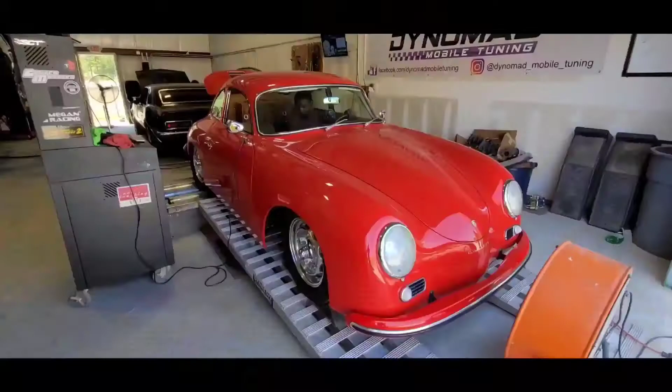Will it Dyno? KLX110, 2005, bone stock. Will it Dyno? What will it Dyno? That's what we're going to find out today in this episode of Will It Dyno.

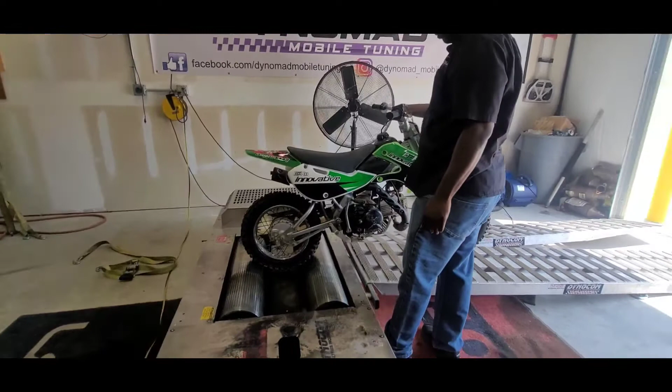What do you think it's gonna make? 15, 10, maybe? I have no idea what it should make. We're sure enough gonna find out though.

Looking good. You gotta strap it down when it's a beast. Safety first, baby. I think it needs a rear shock. Yeah, I think it needs an upgraded spring. We're a little too heavy for this little thing.

Let's get our dyno software up and running. We use a Dynocom DC5000 using Quantum. We're gonna start a new session for this bad boy. We're gonna set up a new run. Gotta turn the dyno on. Dyno always forgets it.

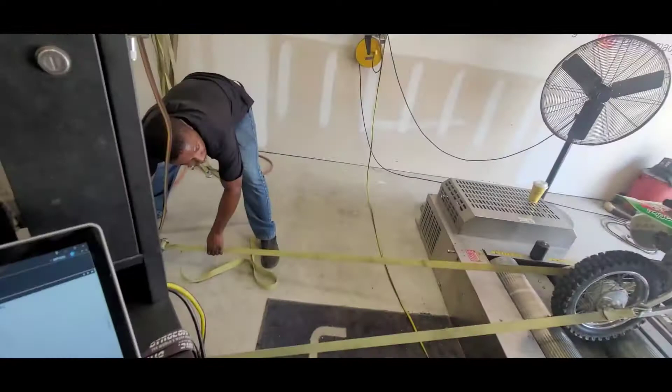I'm gonna move that top strap, that other strap, so that it's not close to the chain. It ain't gonna hit now when you let off. Good idea. We're gonna do a gear roll on, and no load, because the rollers are enough of a load, to be honest.

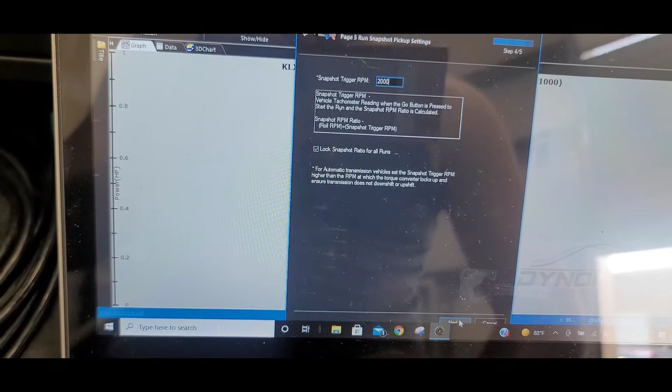Let's see, I'm gonna do snapshot. We don't know what the 1-to-1 ratio is, we're just gonna use third. We're gonna just take a wild guess at 2,000 RPMs to snap it. We really have no idea, so the power to RPM is not going to be accurate, but it will give us an actual horsepower reading. So that is good. So we're about to see what it'll do.

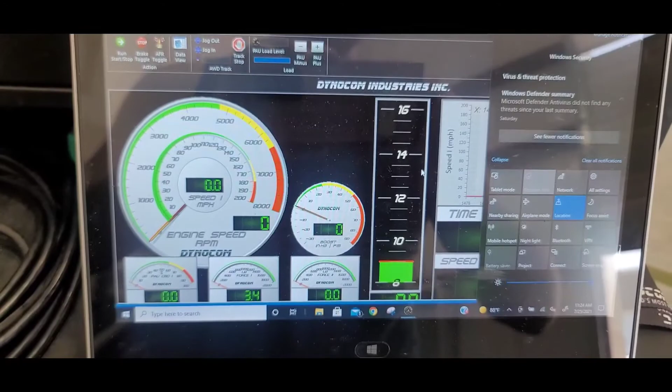So let's see, the best way to run this, you don't take this thing out, we go all the way around. Cool, it's ready. Yeah.

Fire up first shot, feet on the rollers. This is our first motorcycle. Yep. This shock. This is gonna be tricky. Alright, I just gotta make sure my feet don't hit the rollers and suck my body up into it. Easier said than done.

Alright, what sounds about like 2,000 RPM? That sounds about right, that's it. Is that right there?

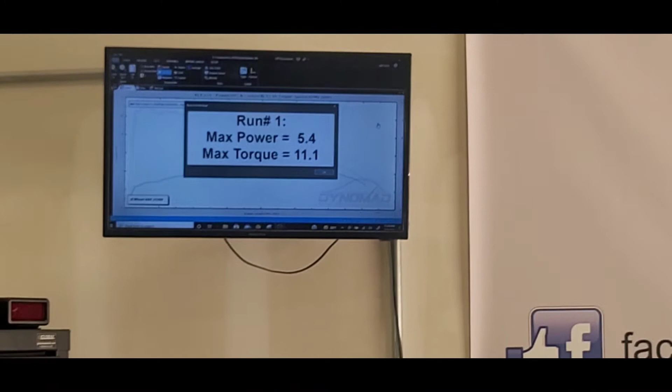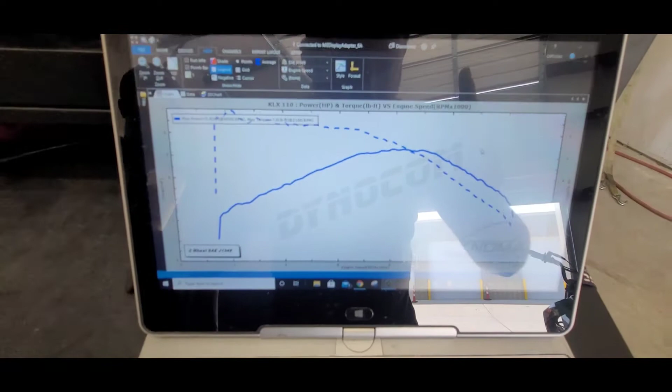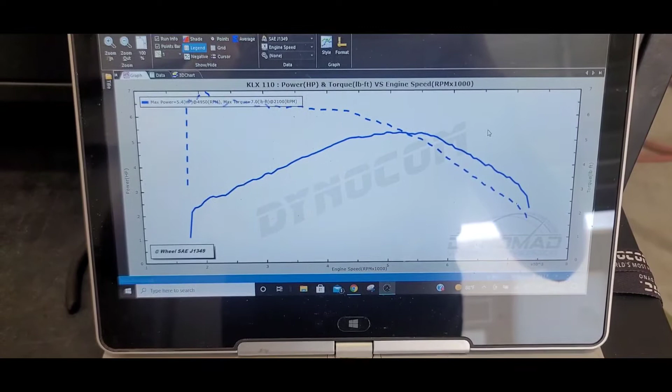All right, so what did the little KLX110 make? Well, whenever the RPM was correct, it made 5.4 wheel horsepower and 7 foot-pounds of torque. From the factory, they're rated at 6 to 7 horsepower at the flywheel and about 7 or so foot-pounds of torque. So 5 horsepower out of a KLX 110. Maybe we do some modifications to it in the future to see what kind of power we can gain out of it.

We'll see. So anyways, will it dyno? Yes, it will. Is it accurate? Yes, it was. Will we get more results later on? Absolutely. Stay tuned. Found a few things wrong.

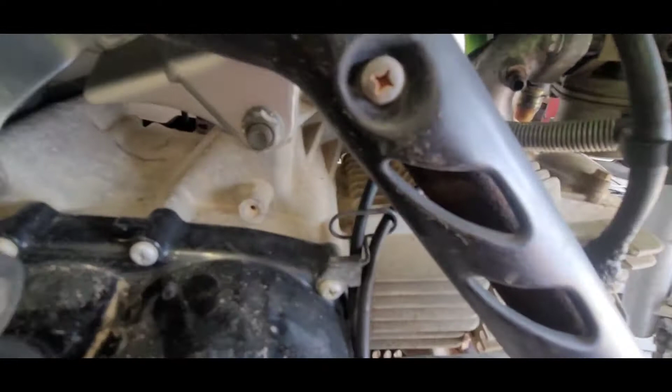Whatever this little, we know nothing about dirt bikes. Oh shit. Oh no. Oh no. Don't fall. Don't fall. Don't fall. You can, come on. Oh God. Oh no. You can do it.

Okay, yeah, so whatever that hole is on the, I guess that would be the intake manifold going to the head, there was like a little cap on it. I'm pretty sure that's a big vacuum leak. So it just dynoed at 5 horsepower with a big vacuum leak. We're gonna fix that. Maybe we'll do it again and see what it does.

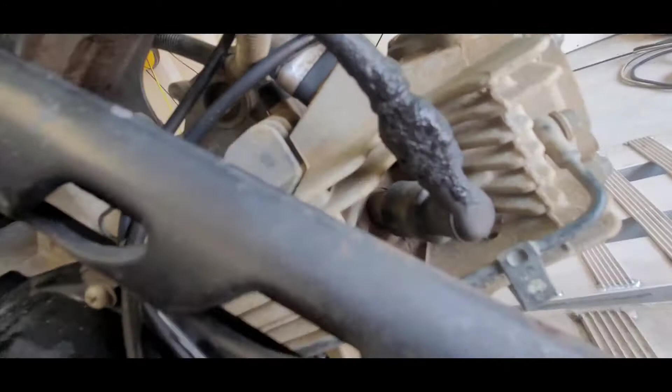I don't know, I'm sure this thing has all kinds of weird quirks. I mean, look at this spark plug wire, that can't be good. Picked it up yesterday, no idea the condition. So we'll fix that and see what it does.

All right, got that little leak fixed. Good old cap and a zip tie.

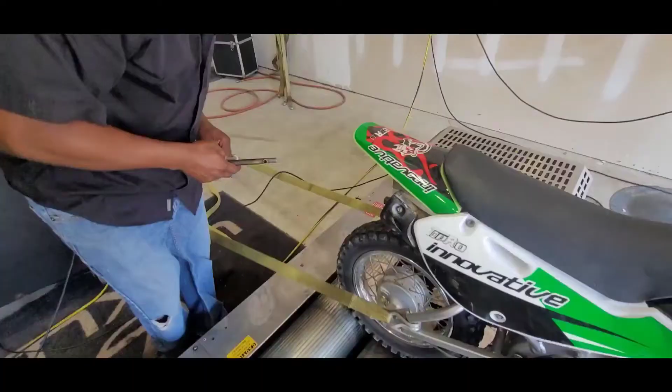Well, there's only one good way to find out if something is running right. Not zip ties, but...

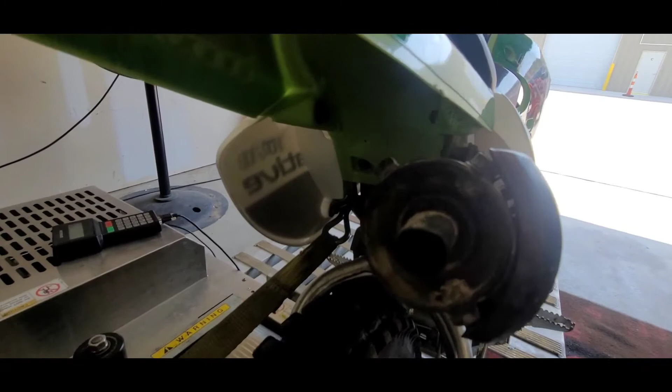AFR gauge. We want to know what the air to fuel ratio is coming out of this thing. So we're gonna put something right there in that little tailpipe, and it's gonna tell us if it's running lean or rich, and we can jet it accordingly. Maybe it's perfect, who knows?

I'd be expecting this thing maybe, I don't know, what do you think it should run, in the 13s? 12, I mean. Hey, which one of these is good? Probably not the one that's hanging on the wall. No, both of them are hanging on the wall. Well, let's find out, we're gonna make this work.

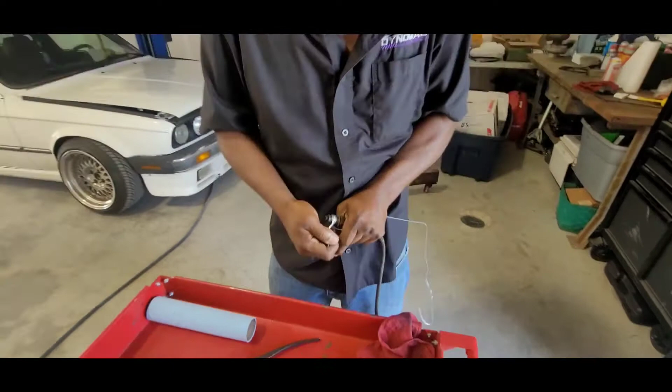Whatever we gotta do to get it in there, secure. Oh, I see, okay. You just... okay, see, this is why I can't be giving away all my damn tricks. Well, maybe I'll edit it out, maybe I won't.

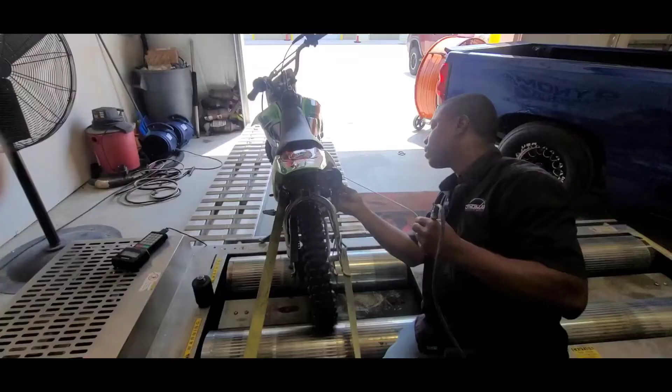The sniffer wouldn't go up in there? It'll block the hole. Oh yeah, well probably not the best solution. So this will be completely inaccurate, but it will tell us something. So we'll see how it goes.

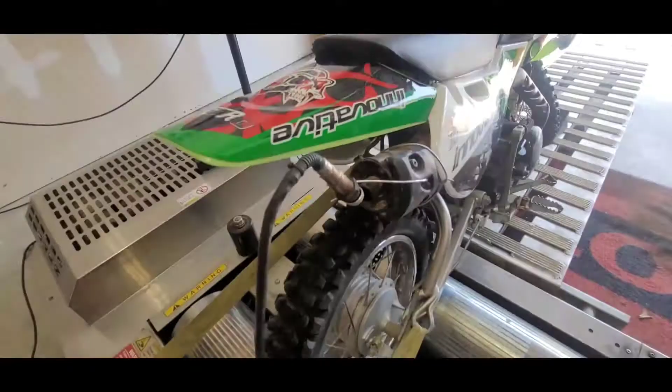The man is a genius. I mean, it'll give us something. That's the angle of the dangle that you need and everything. It is in free air, so it ain't gonna be that accurate, but it'll be interesting to see the result.

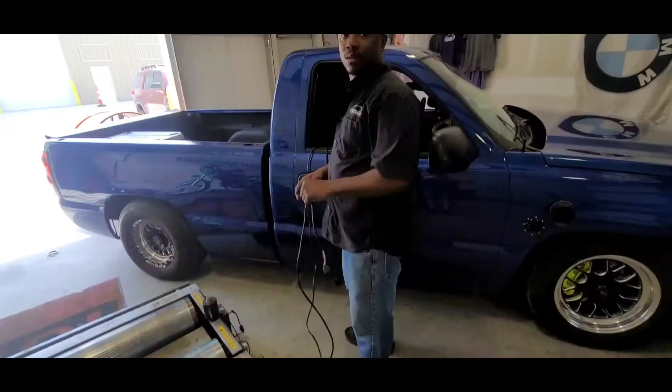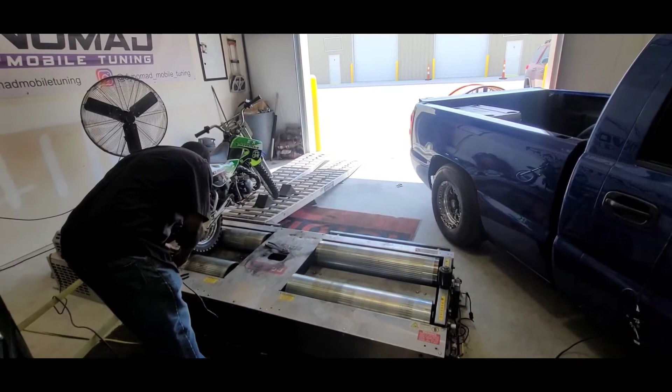One thing we didn't consider was the power output for the wideband, so we're just gonna borrow power from power. I'm gonna borrow some power from Zach's little Silverado here.

Probably one of the prettiest trucks I've ever had come in through the shop. What is that? What do you even do with that? What's that for? Why would you do that on a street truck? Jesus Christ, this guy's crazy.

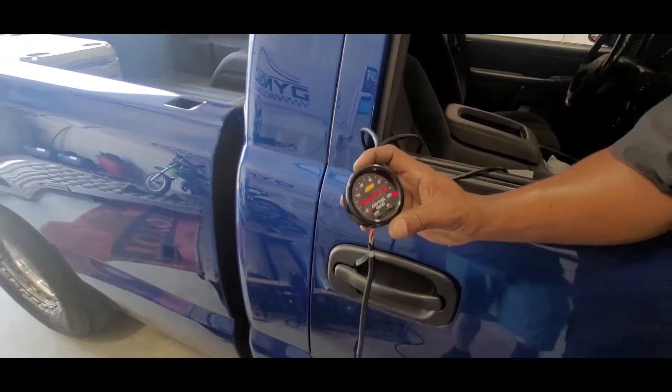Well, that's gonna work just fine. Connector out of the way, and it's reading off the charts as it should. We're gonna find out what it reads. Nope, nothing now, but when you get on it, oh yeah. What's it reading? 13, gets down in the 13s. About what I expect.

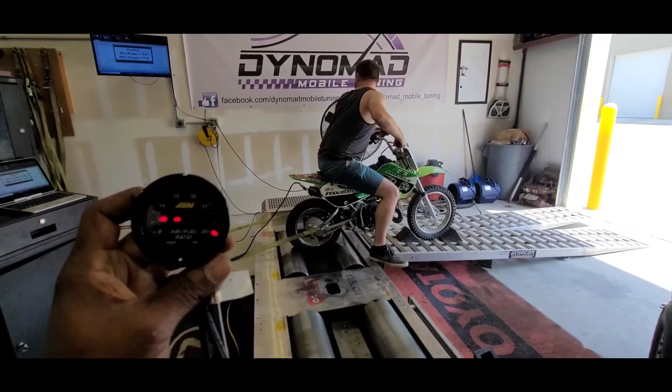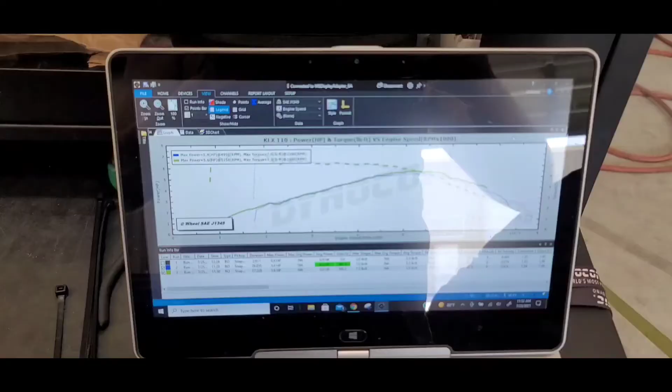Well, picked up a little power, probably from nothing, honestly. It probably means absolutely nothing, but you know, it did pick up a little power.

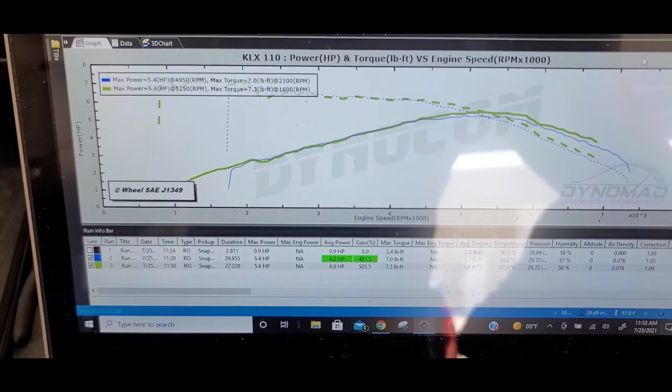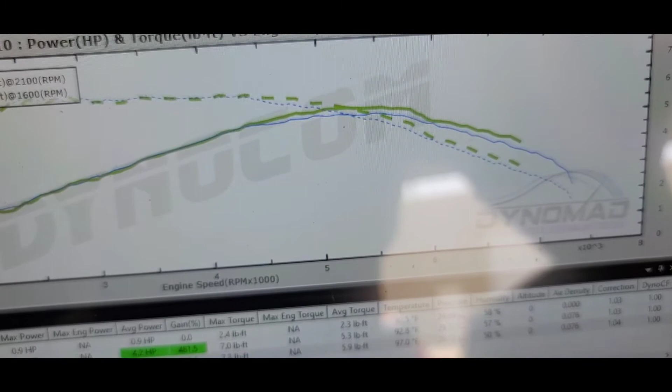But you can see the difference in the top end after 4,500 RPMs, it really picked up a little bit. I don't know if that's due to us fixing that vacuum leak or what. Who knows, no telling, doesn't matter, negligible, probably won't ever feel a difference. So 5.5 horsepower and 7 foot-pounds of torque is about right.

I think that's it, let's see.

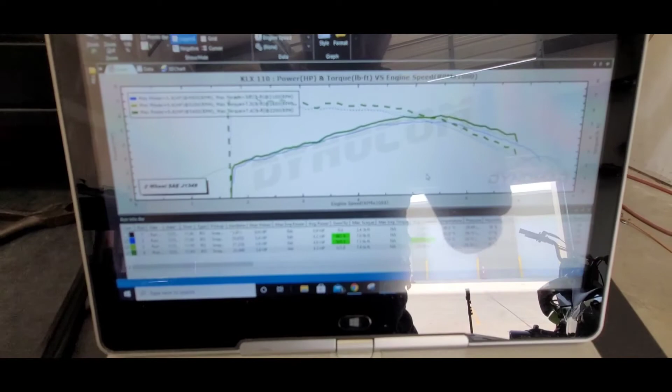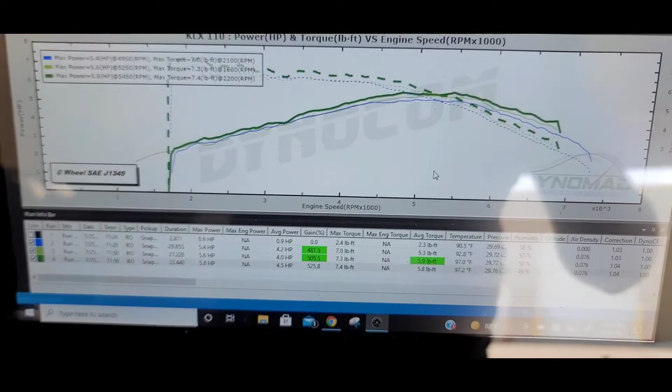Adjusting the air-to-fuel mixture ratio a little bit richer, picked up another tenth, oh, two tenths. Yeah, you can see it right there too. The dark green line is picking up even more on the top end, so it likes the fuel up top. It's not liking it down low, but you can see the torque, it likes the fuel down low for torque. Really everywhere it wants the fuel.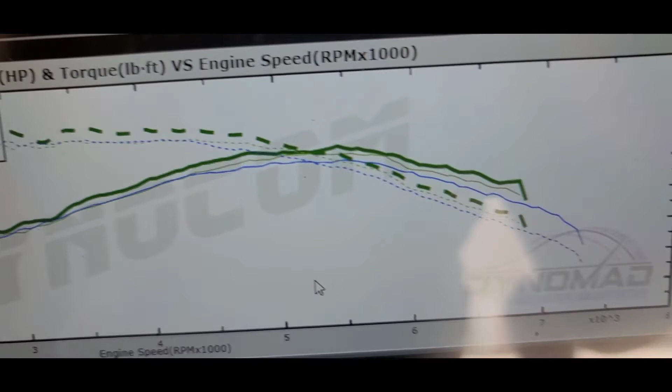So open up the spark plug gap, it really needs a new wire. Have you seen how melted that thing is? It's bad. All right, I might play with it a little bit more, see what we get out of it.

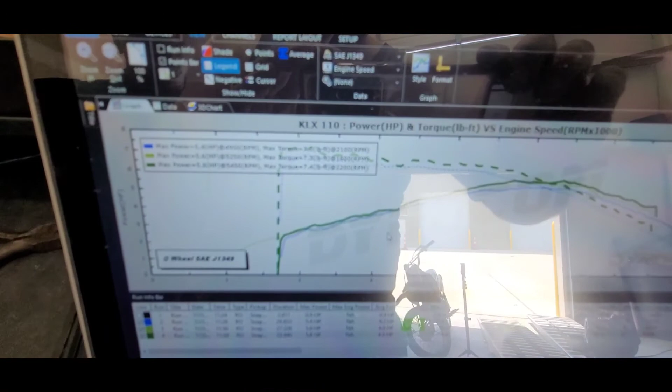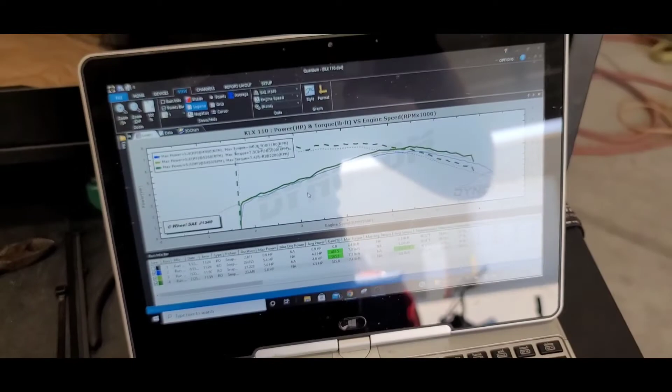Alright, so the little KLX did pretty good today, picked up a little bit of power, especially on the top end, you can most definitely feel it. Really surprised about the power difference that just a little bit of a mixture change makes in the whole power band. I mean, I guess in the grand scheme of things, on a little 150-pound bike, which is what apparently it weighs, it's really light, you know, half a horsepower is pretty good, and half a foot-pound of torque, you're gonna feel that. So anyways, pretty successful, we're excited about the new toy.

Pretty fun, huh? Yeah, man.